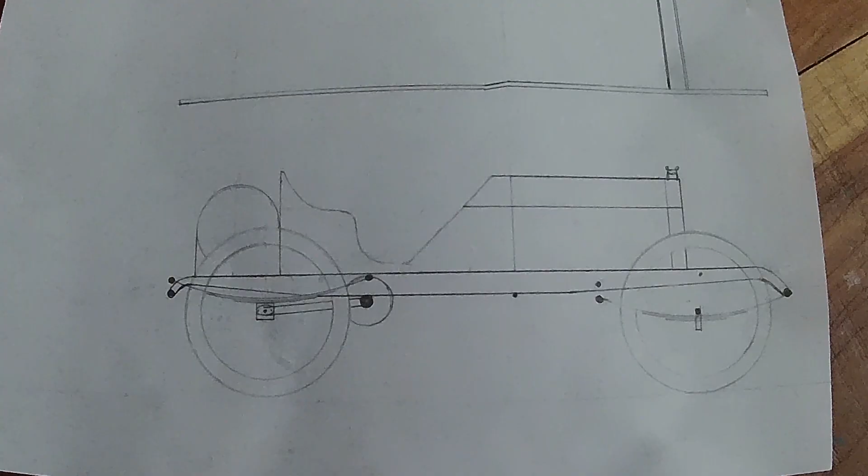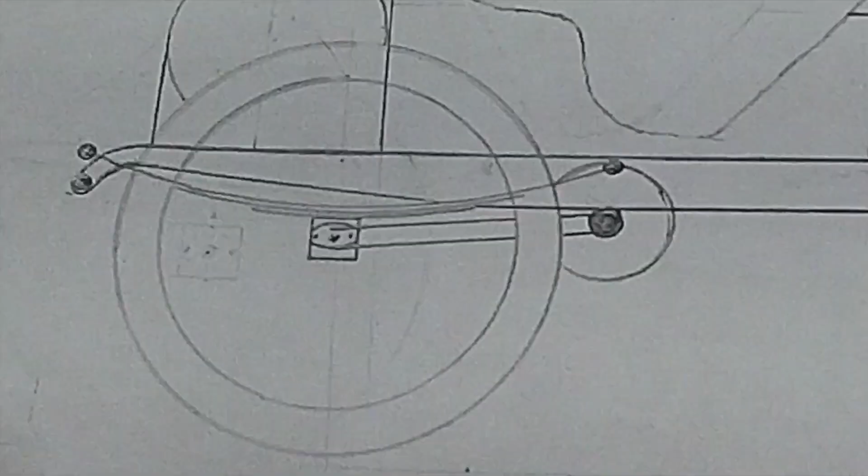1906 Locomobile is my inspiration for this Cyclekart build. Here's my drawing that I'm going to be working with. This angle here is what I'm going to use on the frame right here. It will have full suspension, front and rear. I cut these templates so I can mark the curve in the rear and front of the frame, like it shows right here on the drawing.

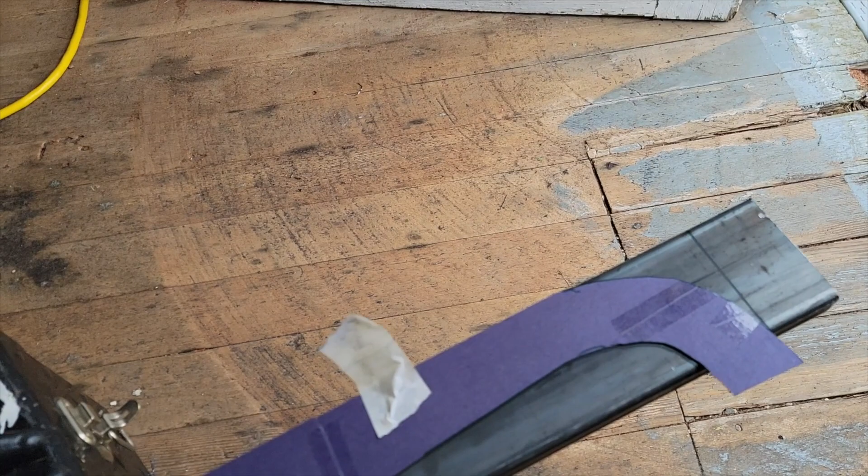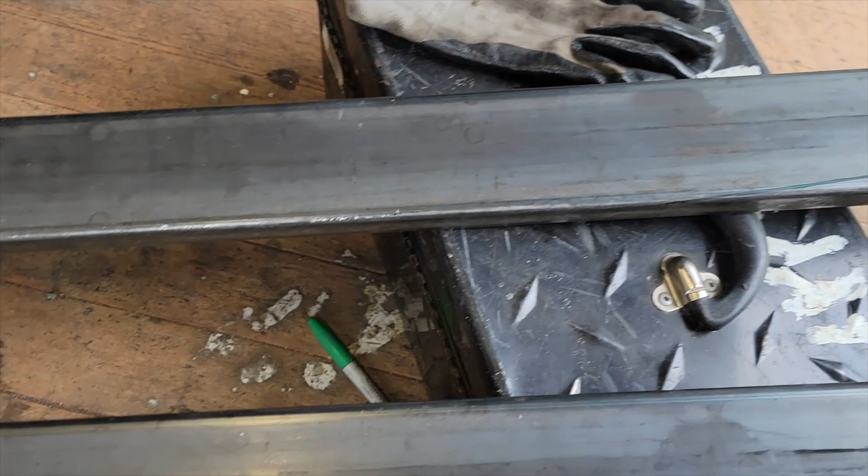Now let's transfer it to the frame. Now that it has been marked, I'm going to cut it following the markings.

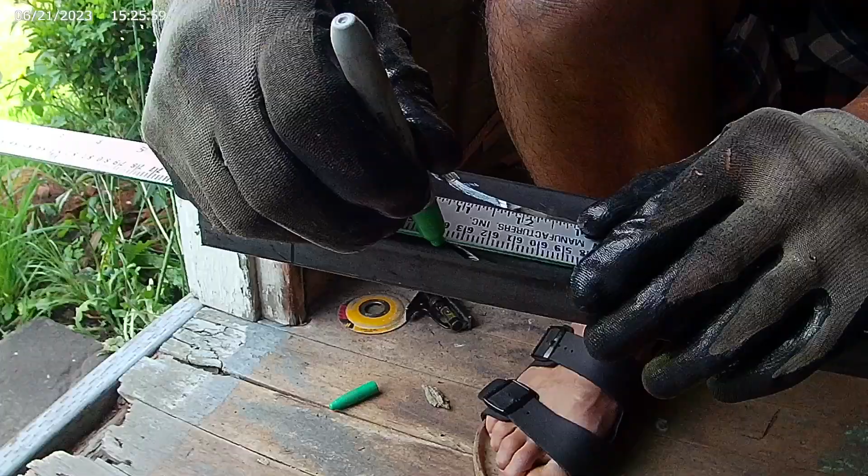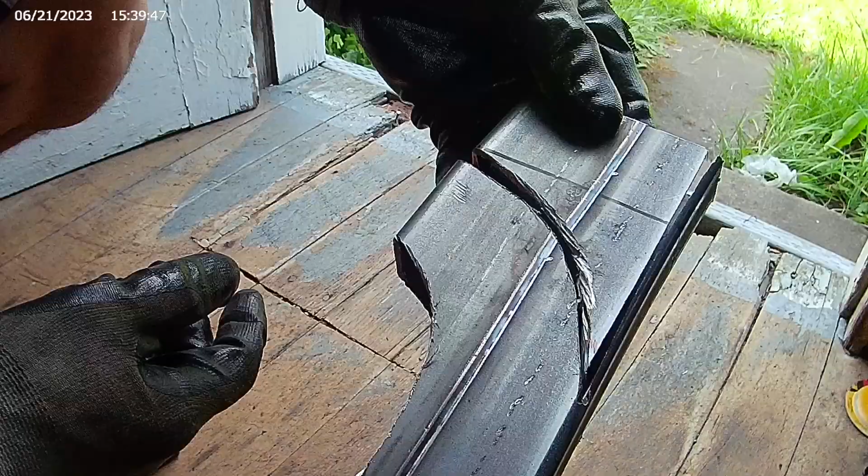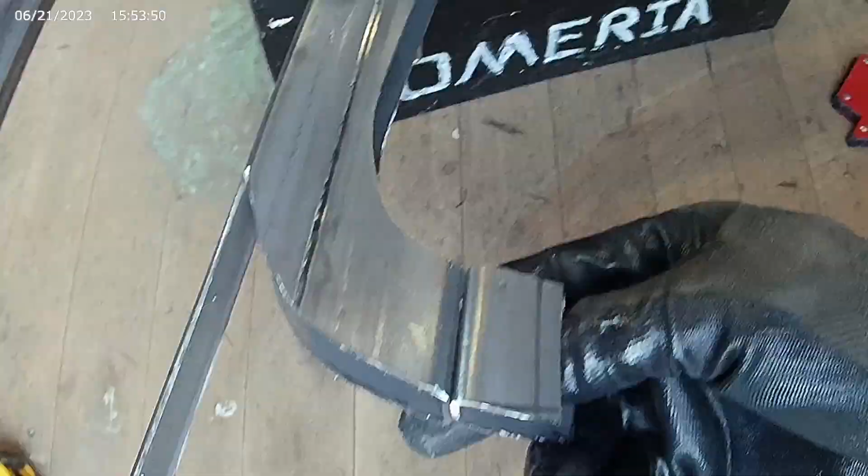Here it is. Now I'm marking here so I can cut as well and use this top strip to wrap around and cover the curve. I will then use this previously cut piece to extend this curve here. Now I'm going to weld it so it can look like this.

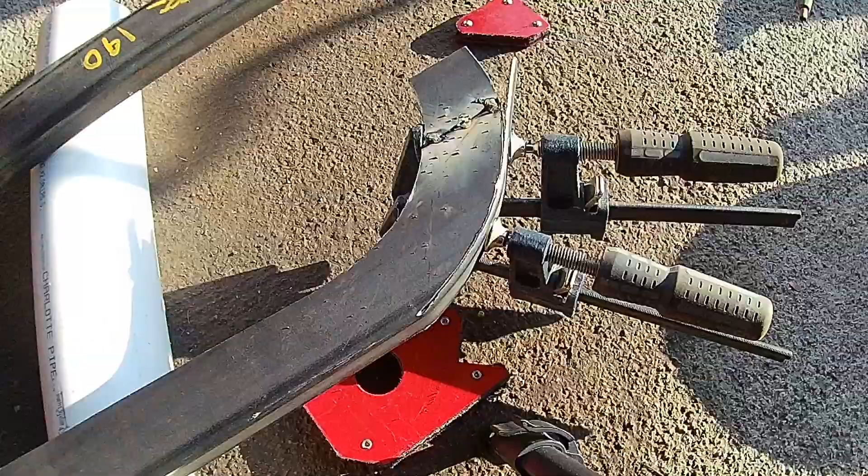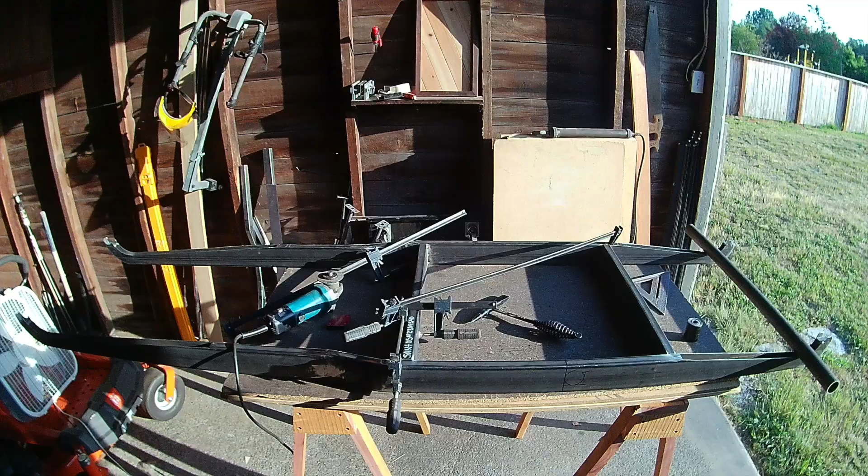I'm gonna drill a hole in the rear end and cut the front like this for later. Here's the side angle, the rear already with the hole. Now let's weld it all together.

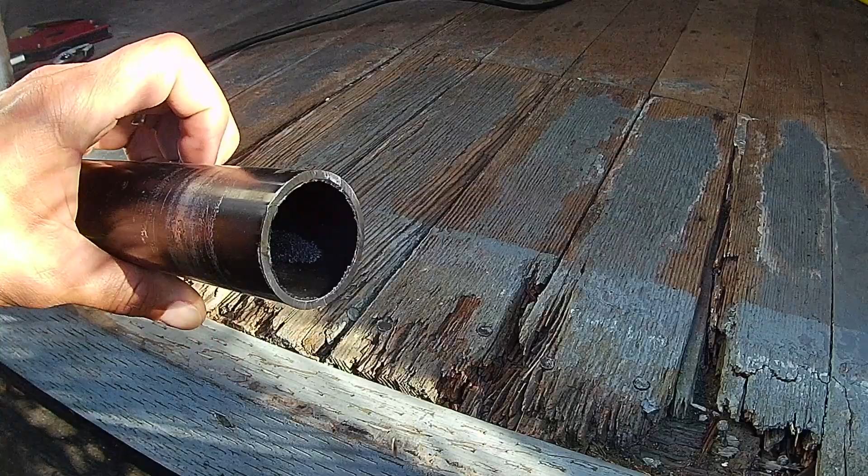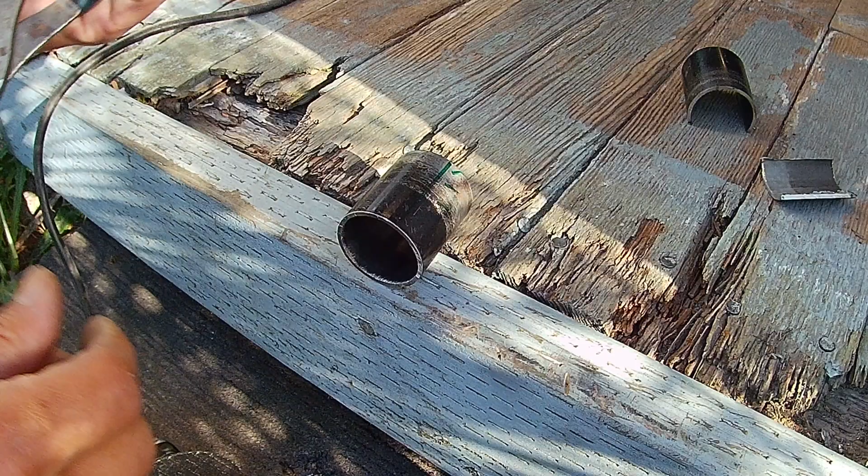For the front end, I'm gonna cut this 1 5/8 tube for the front sleeve to sit on the front side. Right here is where it's gonna go. This is what I'm trying to achieve on the front end. Let's cut about a third off of this piece.

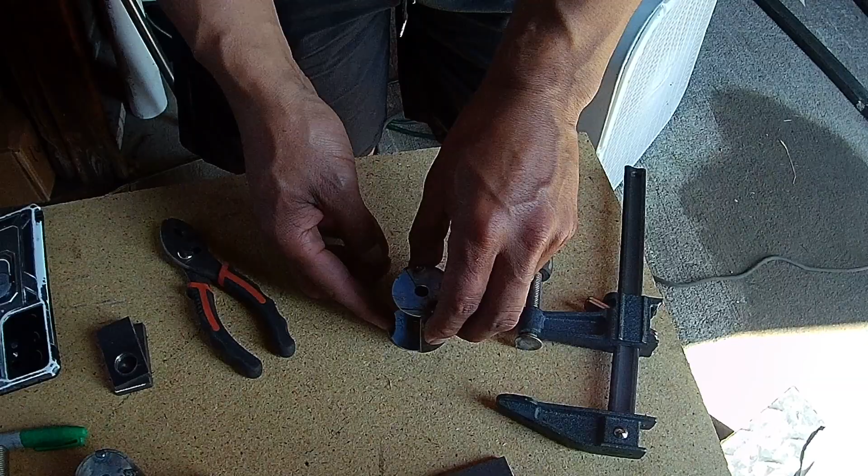Make it look like this. Then I'm gonna add 2 washers on each side so it looks like this. Let's go ahead and weld it on, and this is what I'm looking for. Done.

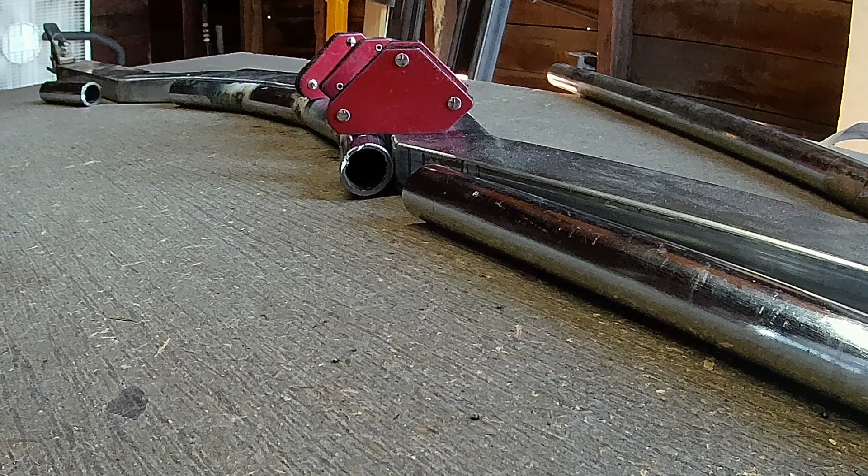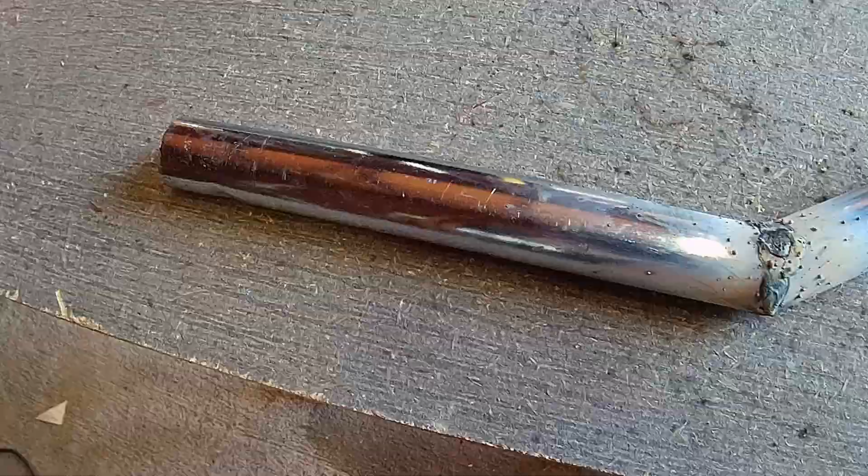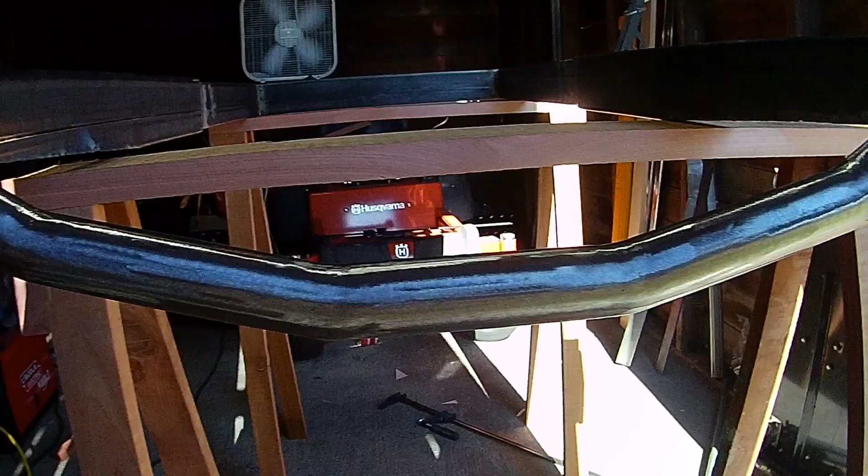I'm gonna cut this other piece here, the cross member. I'm going to use the same curve as the axle that I've already made. I will show you that later on a different video. I'm welding pieces because I don't have a metal bender. Here it is, already done, welded on the frame, as well as this other piece that I already cut is already put together, both sides. There's the rear.

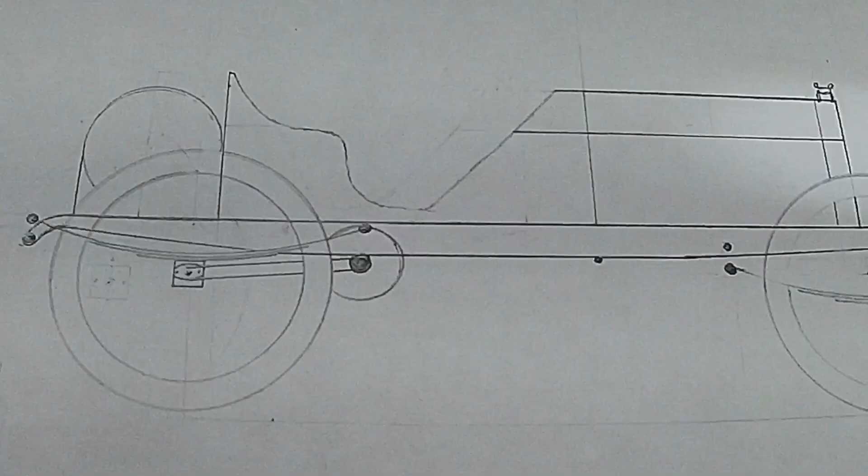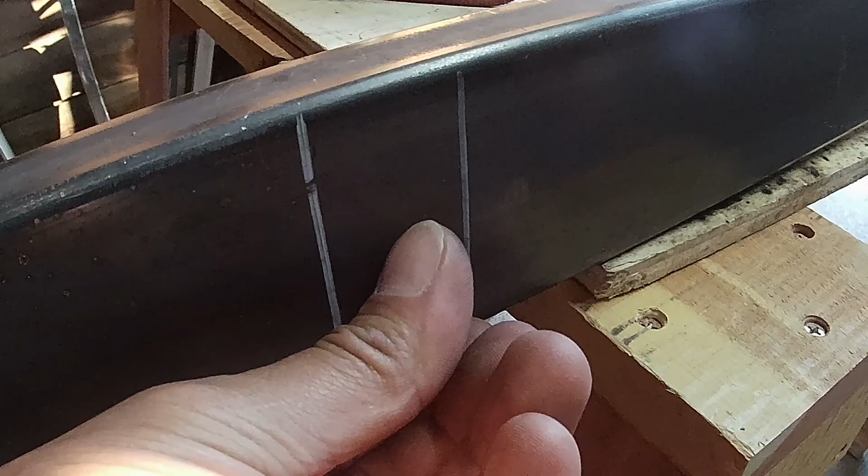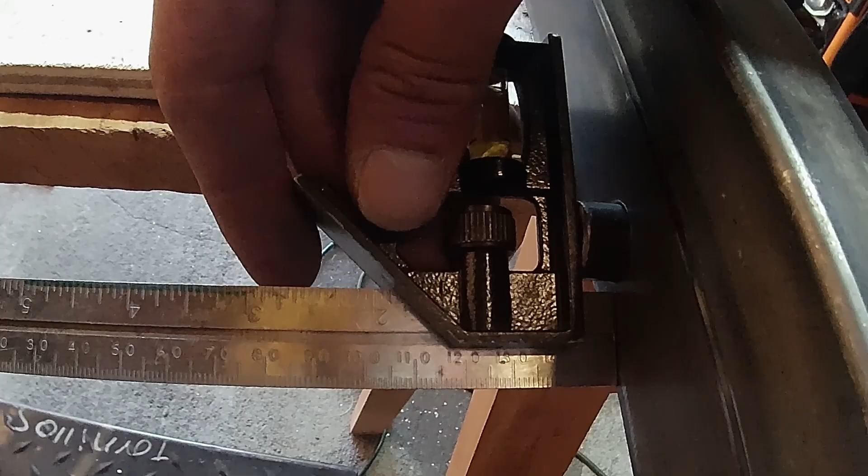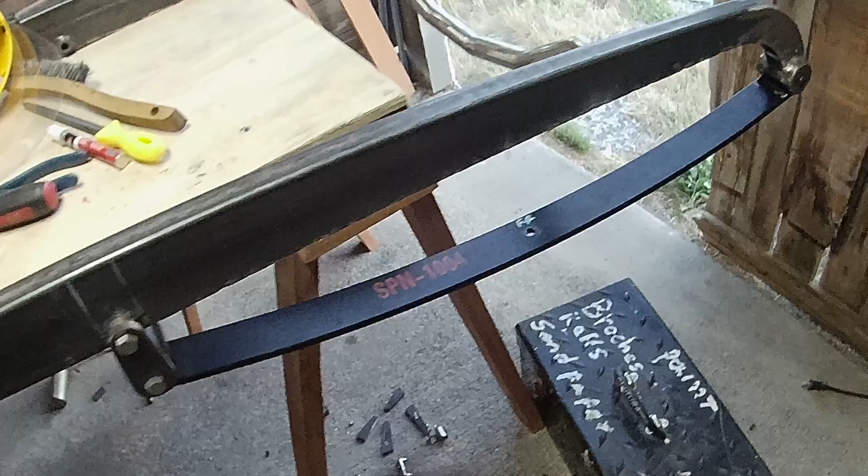Over here, I'm going to need to make a hole and add a little piece of tube the same width as the leaf spring. So let's go ahead and center that. Once secure, this is its purpose. Front is done.

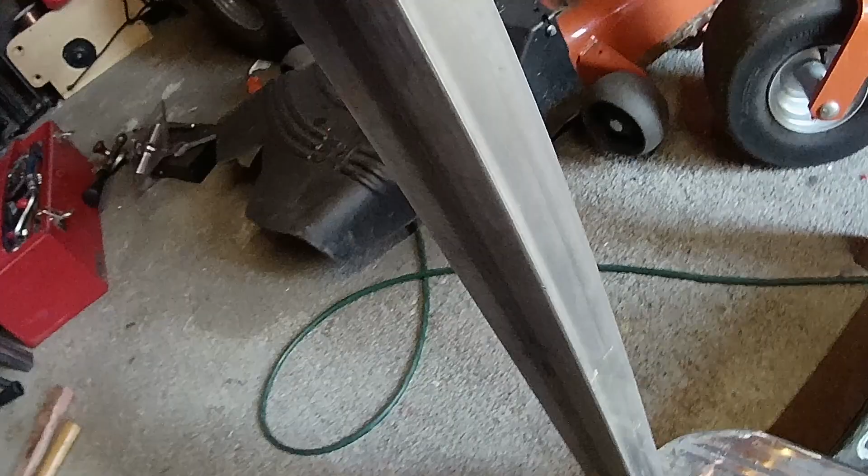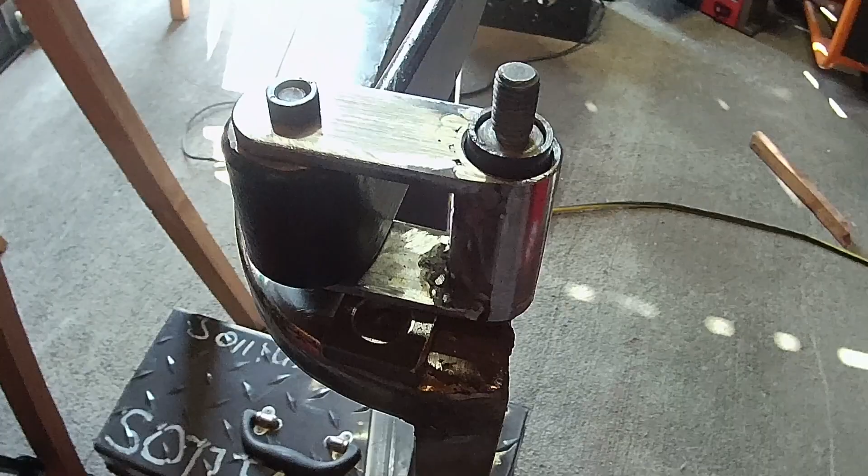Let's move on to the rear suspension. I welded on this 5/8 threaded rod to hold the shackle. I'm using this sleeve to get rid of the play that is on this shackle, since I made it out of scrap metal. On the front side of the rear suspension, I need to cut a piece of this metal like this.

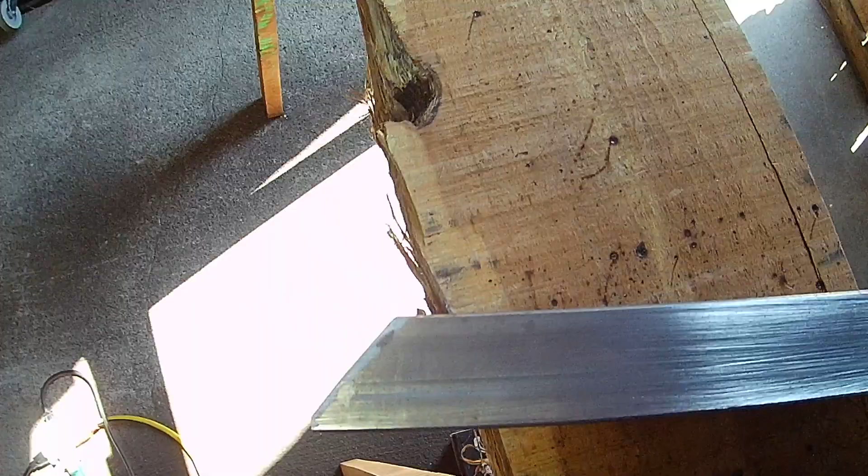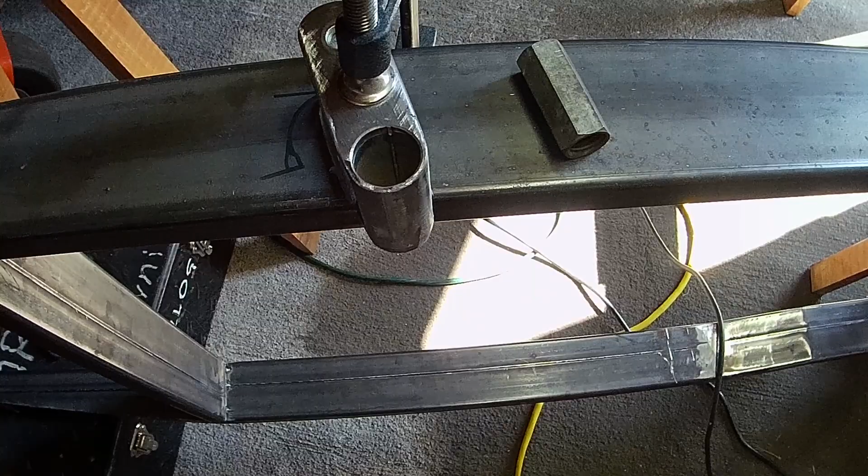I will then attach it to the bottom on this side. First, I'm going to weld on this nut to hold the stud. First, I'm going to have to make a hole on the two pieces that I just cut.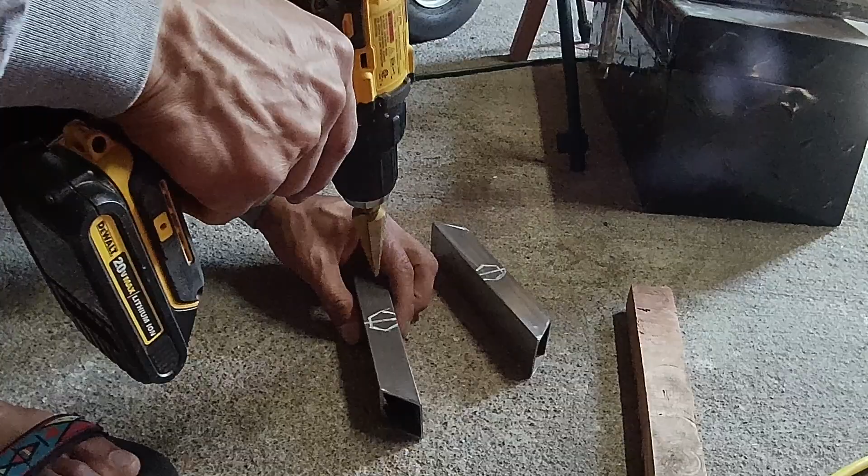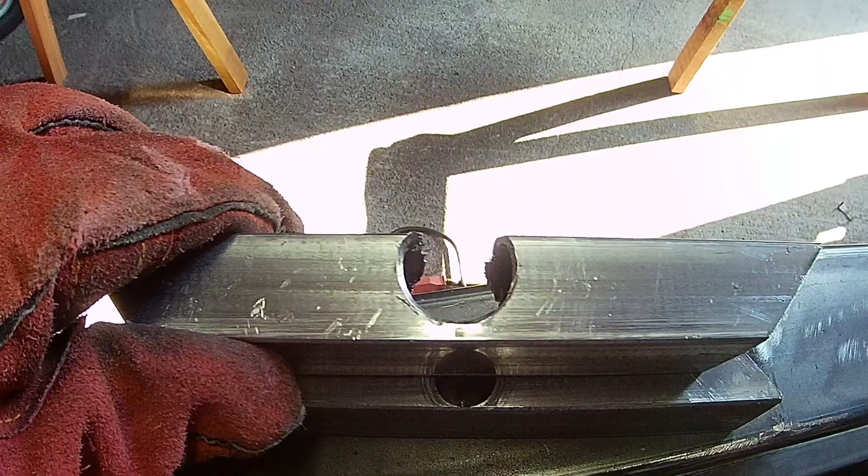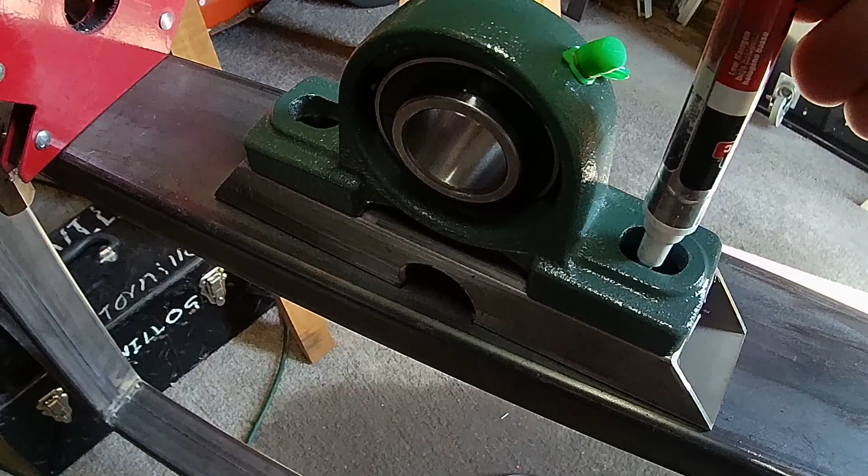After that's done, I'm going to secure this piece right here on top of this nut. Once this is welded, I will mark and drill 2 holes through the piece to attach it to the frame and hold the ball bearing. Then I will weld these 2 nuts to hold this same piece.

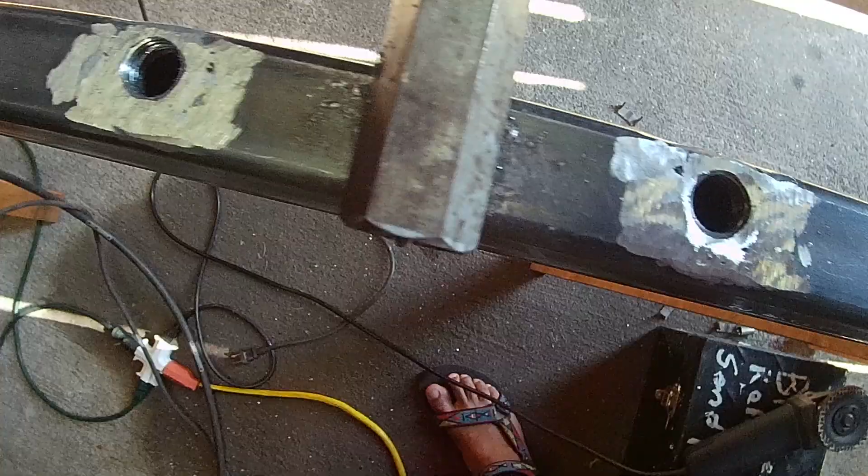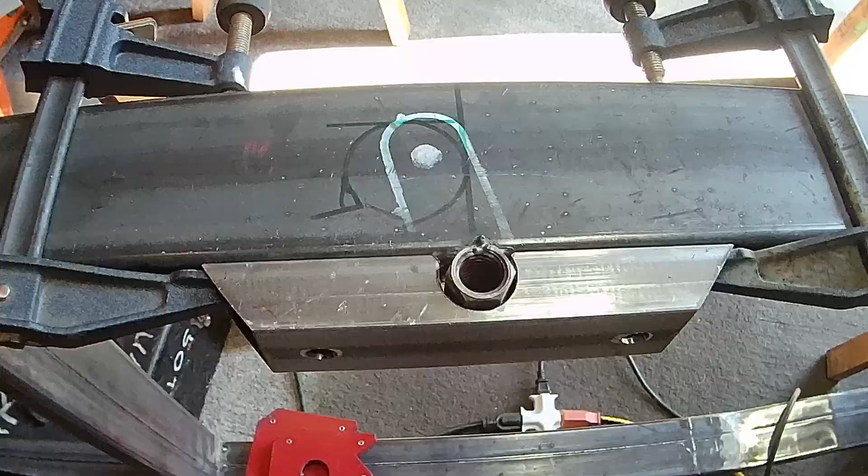Weld it on. Here it is already welded and completed. This is how it's going to look.

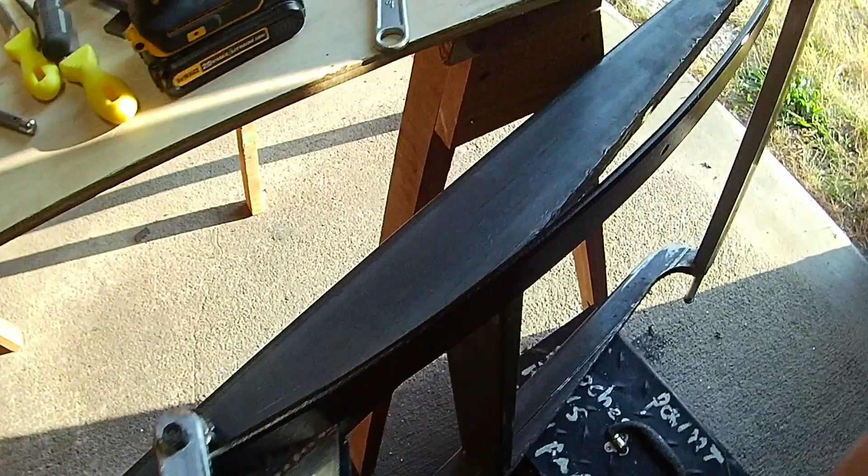The frame is now complete and ready for the next step.